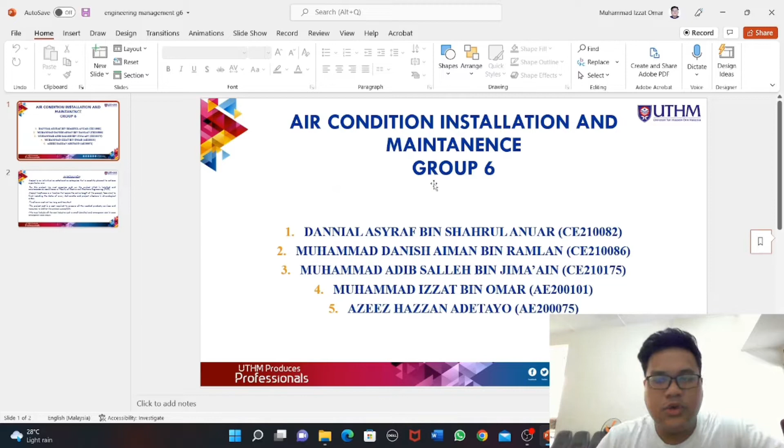Next is introduction. A project is an individual or collaborative enterprise that is carefully planned to achieve a particular aim. For this project, we must organize and run the project, which is install and maintain air condition at Faculty of Electric and Electronic Engineering, FKEE.

Next is project time frame. Basically, what is the project time frame? Project time frame is a timeline that spans the entire length of the project from start to finish, including the dates of every deliverable and project milestone in chronological order. We must keep in mind that the time frame must not be too long and too short.

Next is the project cost. Project cost is the cost required to procure all the needed products, services, and resources to deliver the project successfully, so it is one of the important tools in order to make the project conducted successfully. For the last part in introduction, we must include all costs inclusive, such as small detail and emergency costs in case an emergency occurs. It doesn't matter if it's a small or big cost, but we must include all of the costs.

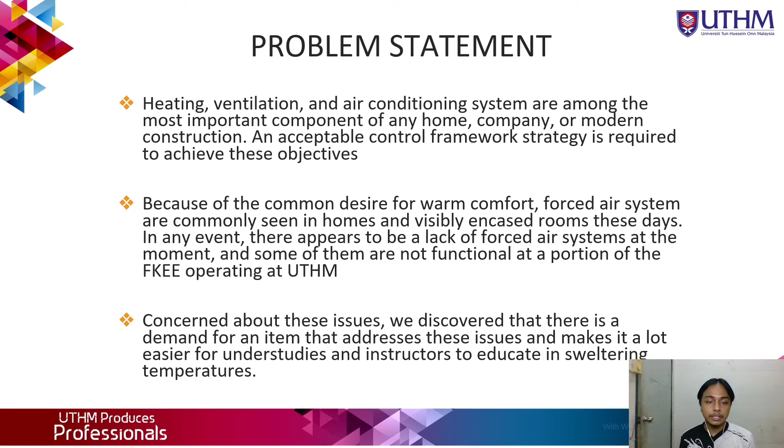Concerned about this issue, we discovered that there is a demand for an item that addresses this issue and makes it a lot easier for understudies and instructors to educate in sweltering temperatures. Next, we go to the objectives of the project.

Firstly, to propose an air conditioner service, maintenance and installation project at Faculty of Electric and Electronic Engineering. Second, demonstrate the ability to produce and analyze graphs for air conditioner maintenance and installation. Third, make an observation on air conditioner performance and efficiency. Fourth, generate successfully a project with complete costing and timing. Lastly, plan the strategic way to place the air conditioner in Faculty of Electric and Electronic Engineering to make sure they feel comfortable. That's all for me, so I pass to the next part.

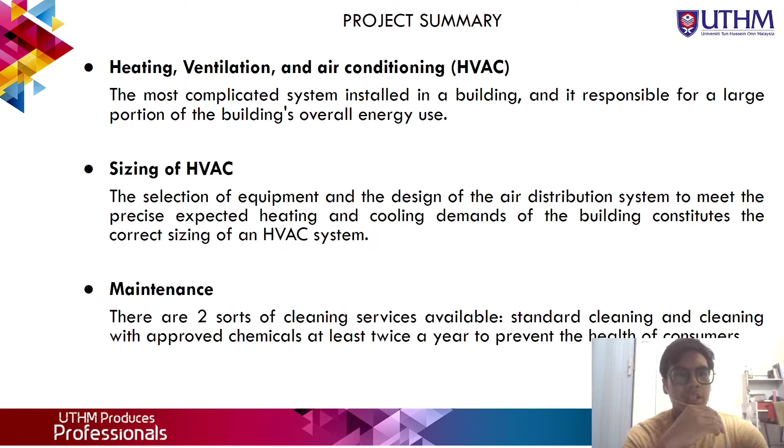The first one is heating, ventilation, and air conditioning, which is HVAC for short. HVAC is the most complicated system installed in a building, and it accounts for a large portion of the building's overall energy use. The second one is sizing of HVAC. The selection of equipment and the design of the air distribution system to meet the precise expected heating and cooling demands of the building constitute the correct sizing of an HVAC system. The sizing of the HVAC system depends on how large the building is and the selection of the equipment.

The third one is maintenance. Maintenance is very important and needs to be done for every air conditioning unit because it can prevent health risks to consumers from any dangerous issues. There are two sorts of cleaning service available, which are standard cleaning and cleaning with approved chemicals, at least twice a year.

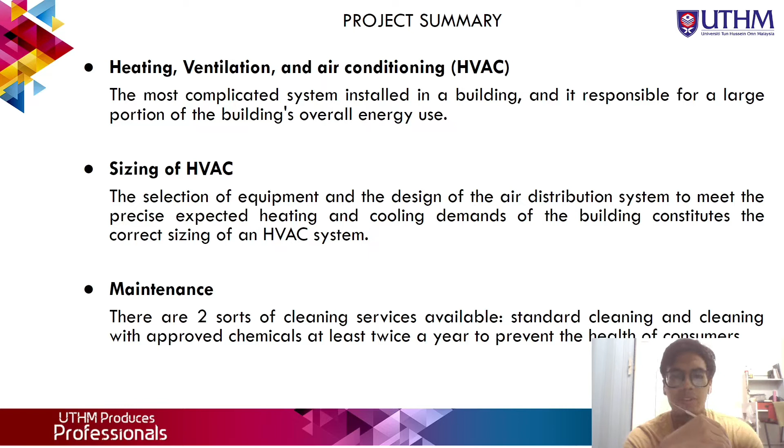The last one is types of installation. There are two major types of installation that will be used in this project, namely cassette 4-way blow and ceiling mounted suspended. That's all for me. Thank you.

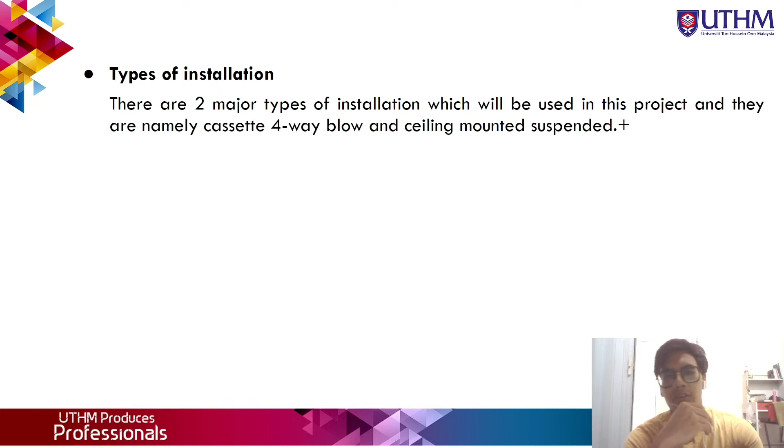First, to make the project scope more clear, decide on all essential activities, consider the project strategy, and determine in detail. When we make a project, we must record all the information so we can get it started.

Next, determine the due dates for tasks as well as the dependencies. We will start doing the project by following the due dates we have set. For example, in this project time frame, we already planned from week 1 to the end week.

Third, reduce the need for ongoing status reports and meetings by keeping the team updated on any change or progress. With this project time frame, our team project can give more output because they have the schedule and they need to follow the schedule to make the project perfect.

By breaking up a large project into manageable chunks over a visual timeline, complicated activities may be made simpler. With this time frame, we can make the hardest part become easy.

And the last one, encourage cooperation between the team members and the stakeholders. With the time frame, team members can be punctual all the time, and make a report and finish this assignment punctually.

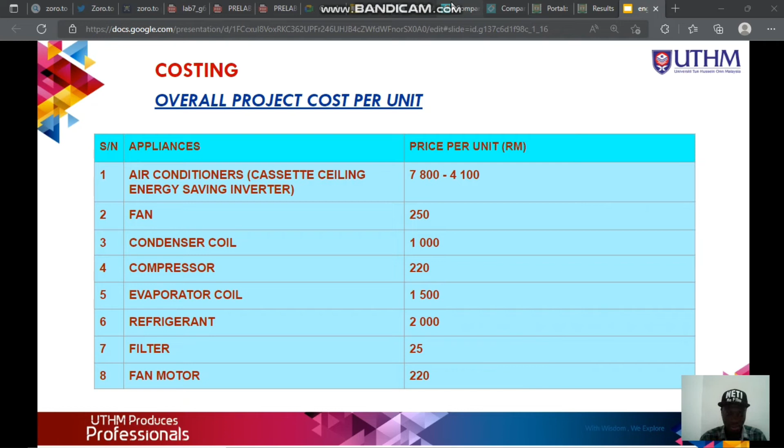So the next part is the maintenance cost. The maintenance cost is categorized into 3 forms of maintenance routine: basic cleaning, chemical wash, and overhaul. Basically the basic cleaning costs around 150 ringgit, while the chemical wash is 200. At the same time, the overhaul is also 200 ringgit.

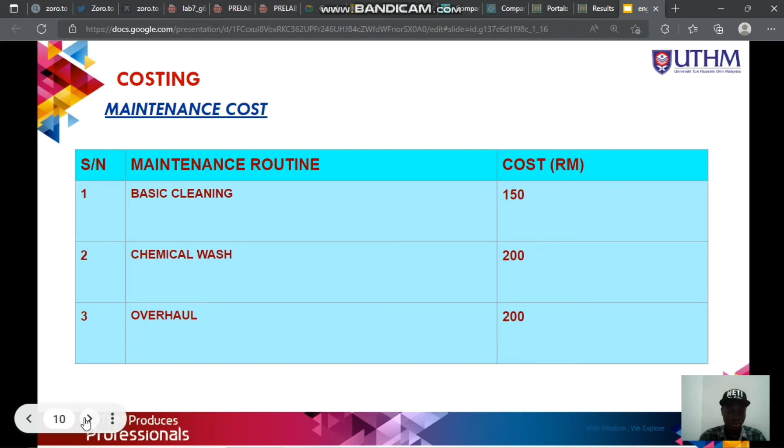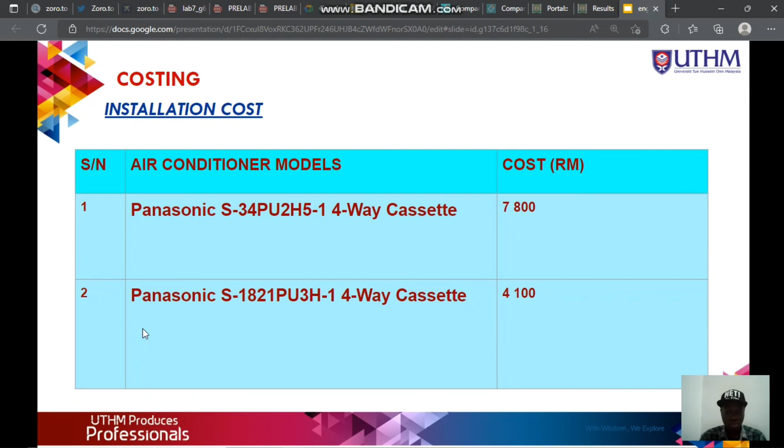So the cost of installation, as well as the price of the air conditioning models that would be used - both are ceiling mounted air conditioners, inverter and energy saving. The first one is the Panasonic S34PU2H51 4-way cassette, which is 7,800 ringgit, while the other one is the Panasonic S1821PU3H1 4-way cassette, which is 4,100 ringgit.

In the costing, salary was also included for the workforce that would take part in the completion of our project. We categorized our workforce into 3 categories of people: the project manager, the laborers, and the accountant. The project manager will be receiving 2,000 ringgit per month as salary, while the laborers and the accountant will be given 1,700 ringgit per month.

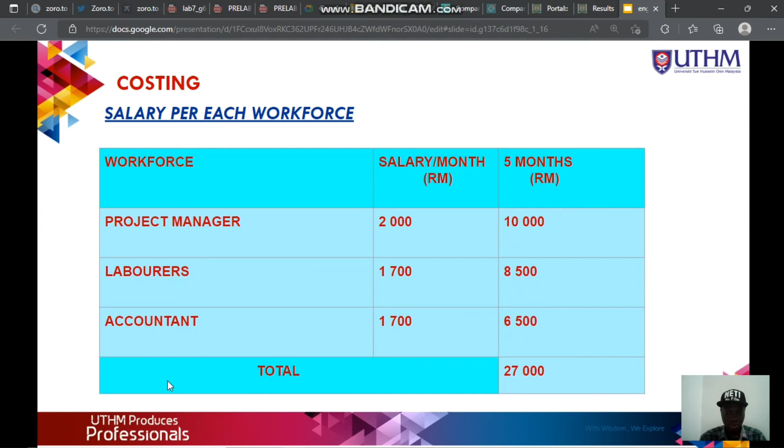And then the calculation over 5 months has been calculated. The project manager has 10,000 ringgit in 5 months, while the laborer has 8,500 ringgit in 5 months, as well as the accountant.

Okay, so the next part is the overall project estimate, together with the total estimate of the costing for both of our services, the maintenance and then the installation.